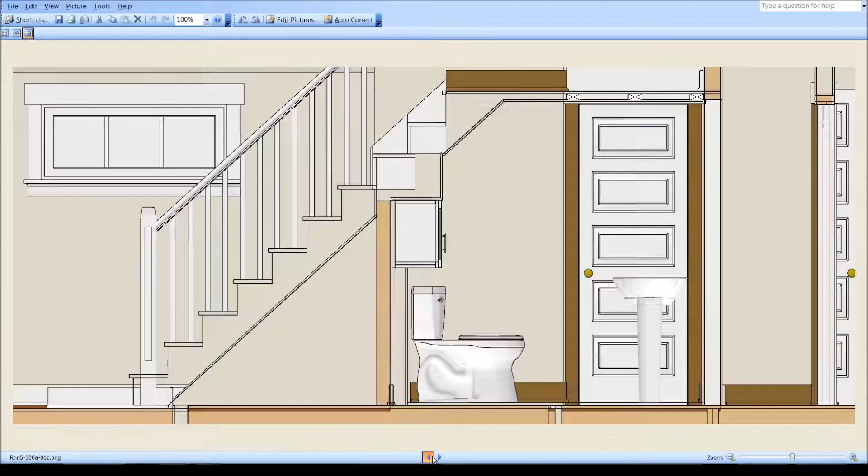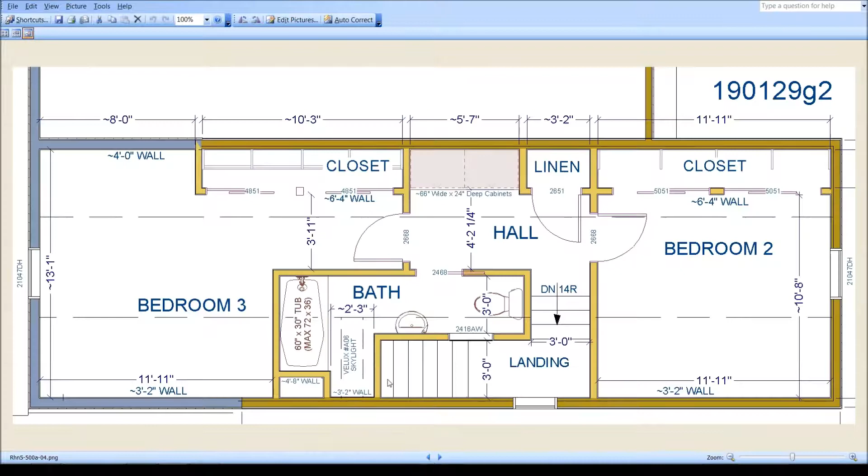These are the dimensions. Even though I don't think it's the better bath of those two, one particular advantage is pretty distinct: this clears this hallway out, widens this hallway and its passage out through here. So now we're able to get full 80-inch doors with no clipping of the corners or no special work there. So that is an advantage of having the stairs come up this way, even though the bath I think is not as good as this one.

So that was looking through here. Anything can happen here, furniture, desks, whatever. I'm just showing some cabinetry for linen storage, towels and so forth. You've got all the storage in the world on this floor anyway, but I just didn't want to add one more closet across here, so I have that left open.

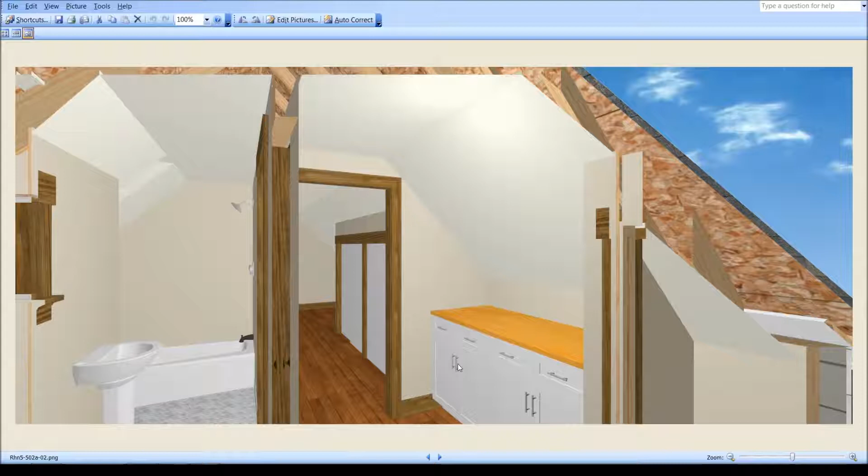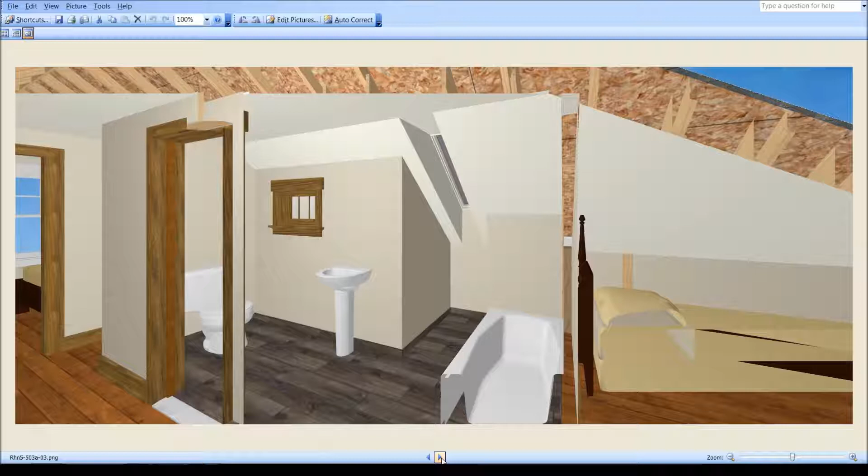And the bathroom itself, you're familiar with this kind of passage through here. This just lets some light in, some ventilation if you wanted it. This shows the skylight, if it were possible. A wider one would be better. This is the most narrow because we're not sure exactly where the framing is for this roof. I don't think it'll be added anyway, but I thought I might as well show it. It gives the person more headroom. And that's just different finishes here.

In terms of that window and privacy though, this is a 6'6" guy standing out here on the landing, and you can see that privacy inside here is not going to be compromised by this opening. That could even be just an opening, although I don't know.

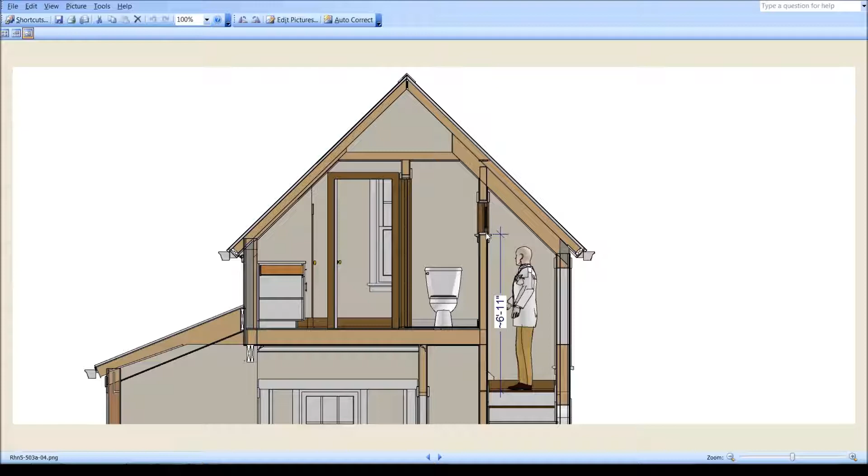In any case, even if you wanted that as an operating awning window that swung out this way, you can see that it would still do that and no one could see in or anything of that nature.

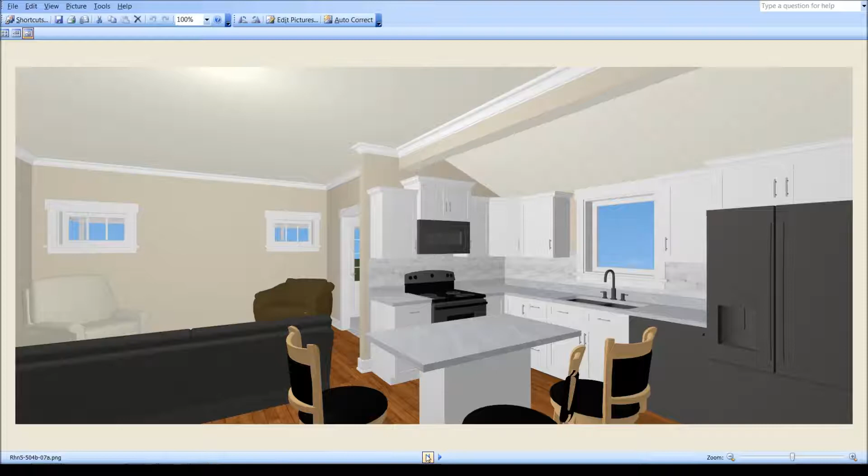And there's without the dimensions. And here's essentially how it looks. We're not going to do that, so that's not even a consideration, as you can see. I made various explorations with a window here. It's not this one, probably not this one either. And with any of these windows, if we put a sill on it and finish it like these others, which it should be, that could also compromise the swing of a door here, so it's something to keep in mind.

I like the kitchen having been relocated up here, not just for the fact that it makes a bigger living space down here, but I think it's going to serve the house itself better located here, and I wanted it east anyway. So I'm a fan of the kitchen here, and then it's just a case of how can we make that work the best with the rest of it.

This entrance is somewhat under the landing, but this is full height, or as high as we want it to be. And this short section of film might give you a little bit of an idea of how that shower is tucked in under there, and how the rest of it looks in this condition here.

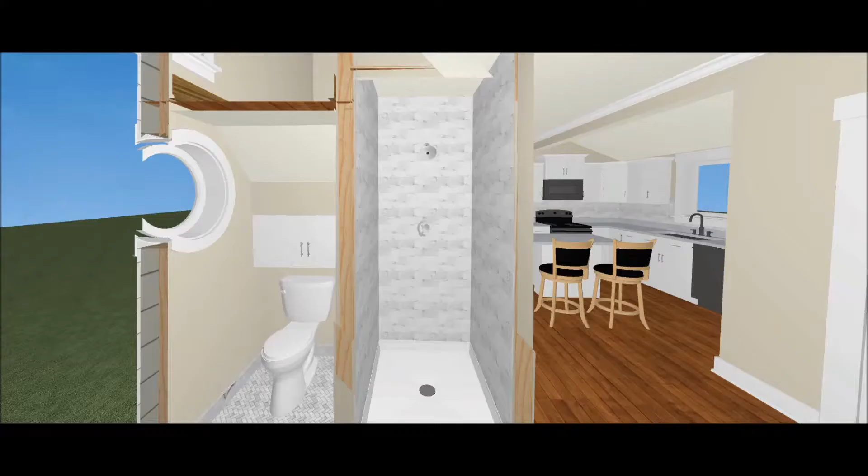And I want to mention with regard to this door and all these plans, keep an eye on it. This is with the typical storm door, and granted, you could always use one of these sliding screen doors that just slides across. Then it's not really even an issue. But I'm showing it with the screen door outside, and when it's hinged this way, you kind of have to step around it to open the door and get in. Whereas with it hinged the other way, it's much easier to have a regular storm door outside and get in and unkey it and everything else.

But this doesn't introduce very well to the rest of the living area. So that's what I think you should probably settle on, is it hinged that way, and just deal with this storm door, or just get what they call a zip screen, and it coils in. You're probably familiar with it, where you don't have any storm door outside. It's weather protected anyway, and it'll be weather stripped, etc. So the coldness isn't so much an issue as getting in and out. And this isn't too bad here, and I don't know if it gets worse in other plans. It may or may not.

But that's just something to keep in mind. Additionally, with regard to any of these plans, in any of them, I have maintained a 3-foot zero door either here or here, sometimes at both locations. So none of the plans have just 2'8" doors. At least one of those entrance doors is going to be a 3-foot zero door, so that you can get furniture and big appliances and so forth in and out without cracking open the roof.

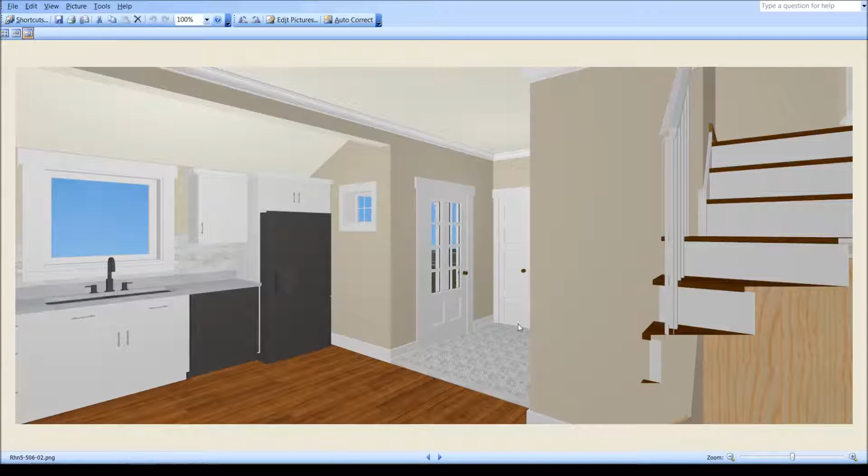And we'd have to decide whether we want a similar beam coming across here. It's not needed, but whether we want that to kind of set this area off. I'm assuming this would have a different floor covering than the rest. So I don't know if that's put in. I don't think it's needed. It's probably more complicated than it's worth.

More experimentation with this window here. I wish I was showing that door switched around, because that's how I would do it, period, and just deal with the storm door outside however I have to, or screen door however I have to. I kind of like this one at the end. I like the view, I like the light. I like to be able to see who's coming to the door when you're at the kitchen sink without having to step around.

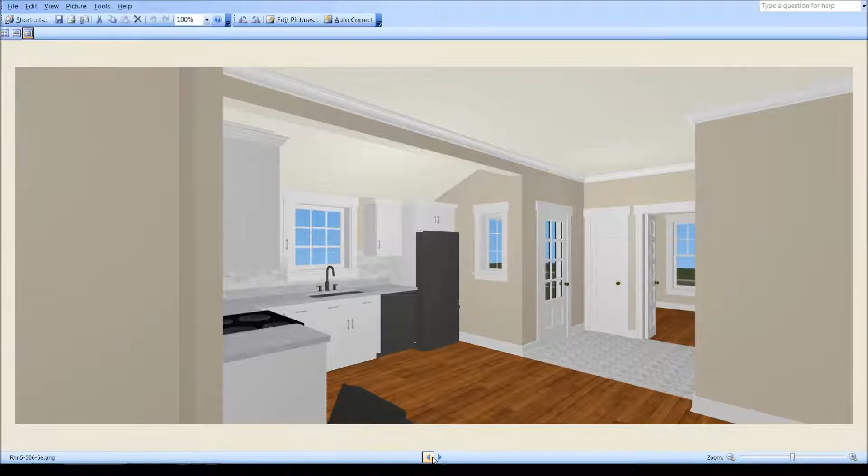I believe I've already talked about this island. Hopefully I have. If I haven't, I'm not going to discuss it again, but I think that should be a table with legs here, with the legs at the four corners, and a drawer at each end going that way and going this way. Nice drawers, 5 or 6 inches high. Still got plenty of leg room, but just particularly this one to provide another top drawer within the kitchen.

There's a 2'8" door, entrance door, 3'0", with or without that beam. There's the closet door open.

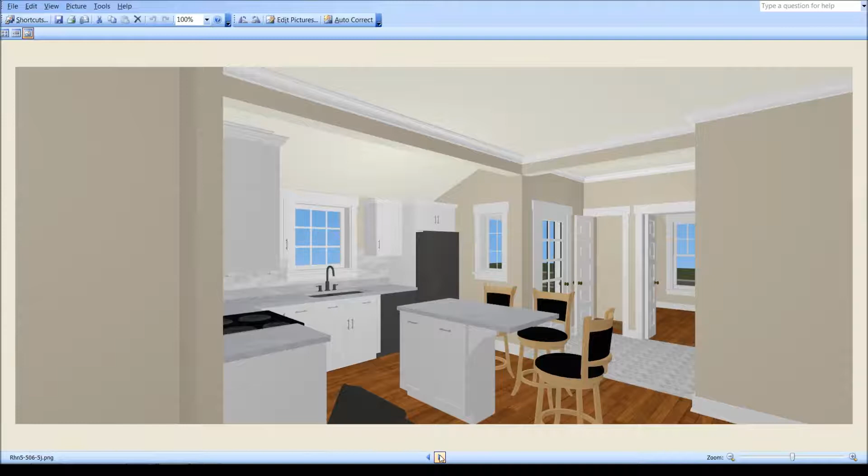Okay, and the next move I made, because I didn't think that we needed this large of a shower for this little bath and just on this floor, and I thought this extra 6 inches here was taking up some room. I didn't like how the floor covering interfaced with this, as you see in this photo here. Down here, not positive about that. I like this arrangement better.

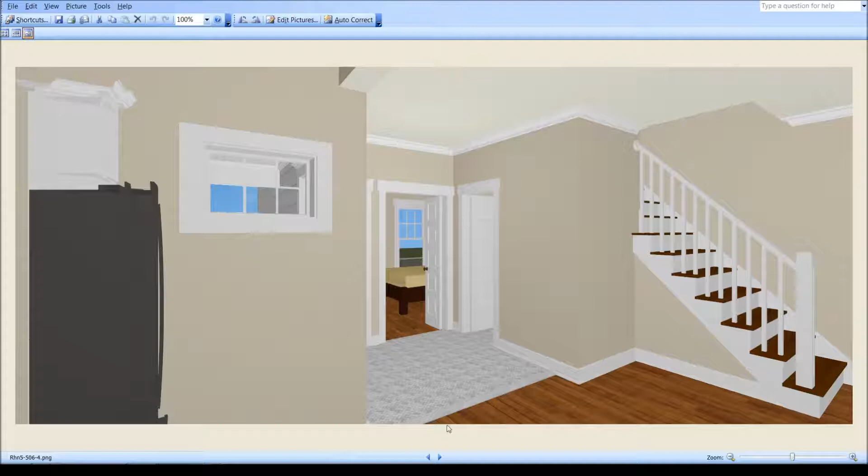This wall was brought forward to provide a place for this railing to end without getting into an argument with this crown molding up here. So I pulled that back another 6 inches and went from 36 by 42 to 36 by 36 shower. Still have all the same clearances, still have the 2'4" door in here.

And incidentally, if the full bath happens upstairs, this door could actually be down to a 2'0" door. I've lived with one for 30 years and it's not bothered me. But it'll be maintained at 2'4" throughout the drawings. So I pulled that back.

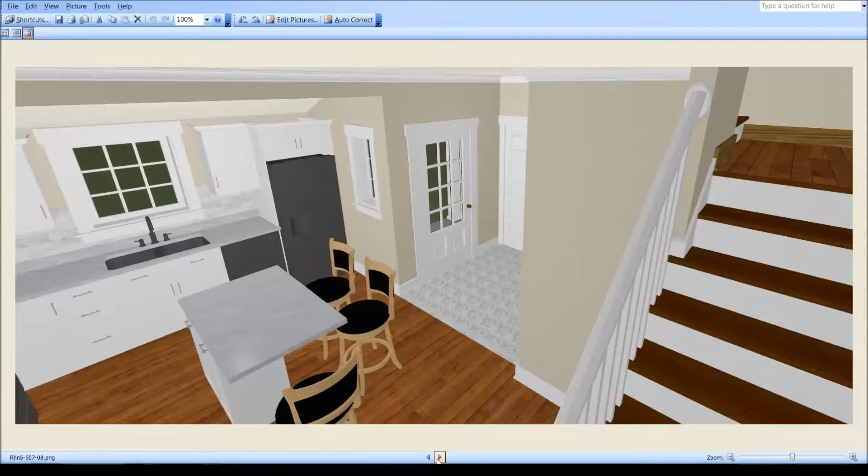That's 6 inches. I didn't really like the result of that up here. I think that could probably be improved, but that was just put together for the moment, just to make sure that that's doable. I think it is. Something just needs improving up in this area here. But I just feel that's better than the other way. I did like that there was less of an offset at the floor covering down here, but I didn't care for that upper part there. I think it could be improved.

And it could be that you actually want the little larger shower, 42 deep, front to back, rather than 36. And if you do, it doesn't really play a role. It can happen regardless. There's no impact because nothing really happens in this little area here. Next, though, we have to begin to deal with this here. I didn't really want this, and I didn't think it should be like that. So I started to experiment. These next several slides are going to be with regard to this region here.

First, I thought the kitchen might be a little short on cabinetry space. I know it is on space for pots and pans and bigger items like that. I don't see any large drawers or anything like that. So I thought maybe a pantry is added here, a standard pantry that you open the door and it's all shelves top to bottom. I don't think that I would do this where it's just this piece. I think it has to come all the way across like this. Again, don't forget these model numbers are critical to identify anything.

Some of these ones that are into the tens here, 62, 72, 92, those are where I've returned to revisit a particular plan. But this was one way to deal with it, and I think actually we could use a little bit more space in the kitchen and it won't kill us down here. And so I pulled that forward another 3 inches to take these from 18 inches wide to 21 inches wide. The washer and dryer are still back here, hooks on rails, shelves in here, and a full pantry here with a 3'0" door from the mudroom.

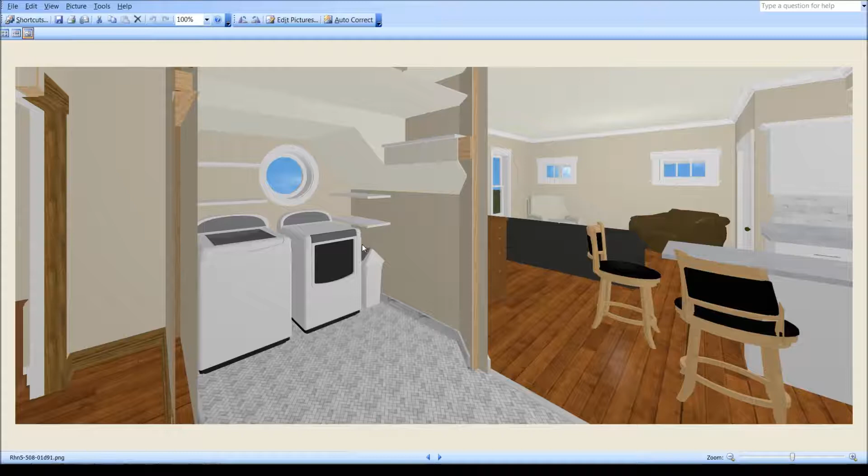I guess if somebody needed it, these machines could come closer together, and some sort of small laundry sink could go in here. I know there's 15 inches of room, so you could have a 15-inch laundry sink in here with the trash moved elsewhere. Here's a section view of that, how it looks through there.

And then the final move just endeavors to make this closet a little larger at the expense of 4 inches in the laundry room here. Like this. And now we can return to your regularly scheduled film.

And this is one of these plans that I had returned to 63. But I had worked with this a little bit more before I even pulled it those 3 inches, just working with the 18, and this was actually the first when I pulled it forward without the pantry at all. We just had the laundry wandering around in there, and there was space to be used. This is kind of an unfinished plan here.

So that was actually the first thing I looked at, just recessing a full height food pantry cabinet in here without a standard door. I wasn't sure that I liked the look of that though, or the expense compared to just buying a door and putting some shelves in, which is going to be just as effective as the cabinetry. Kind of wanted to keep this more living space back here and not have that kitchen flavor spilling over here, even though I feel like this pantry should happen in any plan.

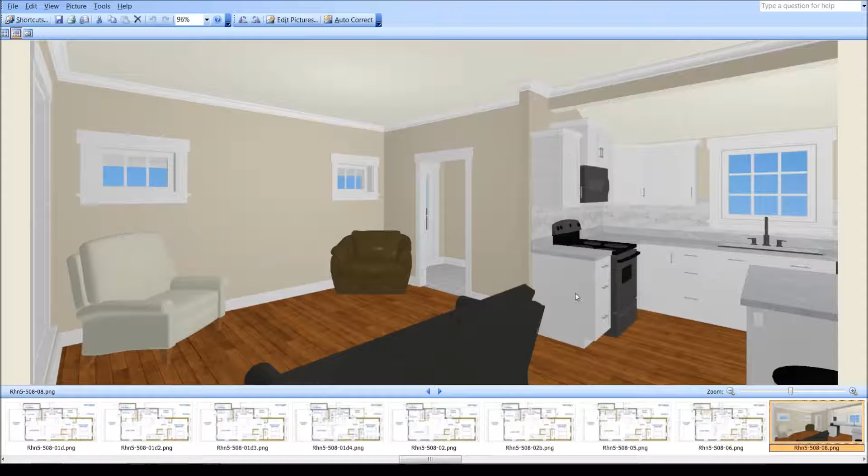But before I decided upon the criticalness of that pantry, I experimented with some other alternatives back here in this space. And so this is just going to be a run through of photos of those various changes. This was the bare minimum we needed for the kitchen with these 18-inch cabinets here and here. And this was adding that regular pantry. Open, see all the shelves in there, plenty of storage.

And then, I wouldn't do this. I don't think this looks good with this notch and that chair pushed back there. So if the pantry's done, I think that should probably just be omitted and pulled over and provide some shelves out here in the mudroom.

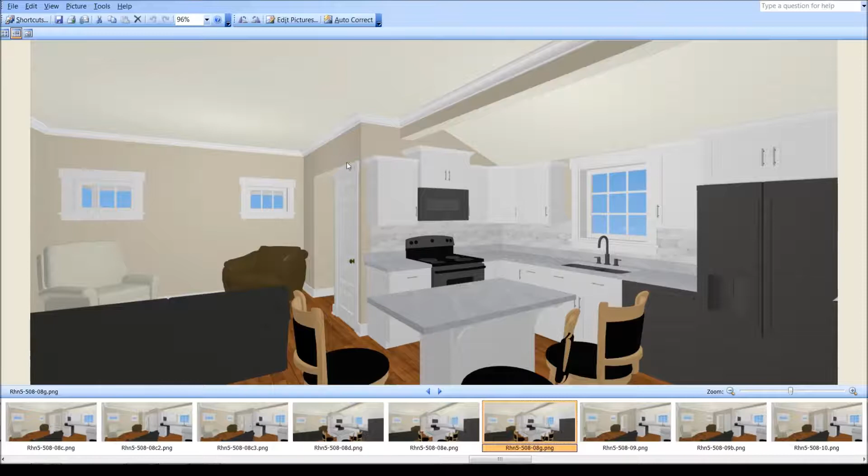And this was getting the extra 3 inches at the left of the range. You see it with just the pantry, pulling that across, and there's the extra 3 inches picked up at the range, which I also think should happen as well. So all of the plans from here forward will show this wall located at this location here.

These were those later ones, the earlier ones, however you want to say it, without the food pantry here. This provides a nice space for art, and maybe there is enough space here or elsewhere in the house for food storage, I don't know. I guess pots and pans can go over here, or maybe this island has some sort of open shelving for pots and pans. That was the built-in pantry there, which works too.

This was when I moved the laundry to the other side of that room back here. So the door's over the laundry. That's a little coat closet back there in the mudroom. That's the recessed coat closet to clear the door swing. And then there was some work with these windows here, working with what we do exactly with these windows on that wall.

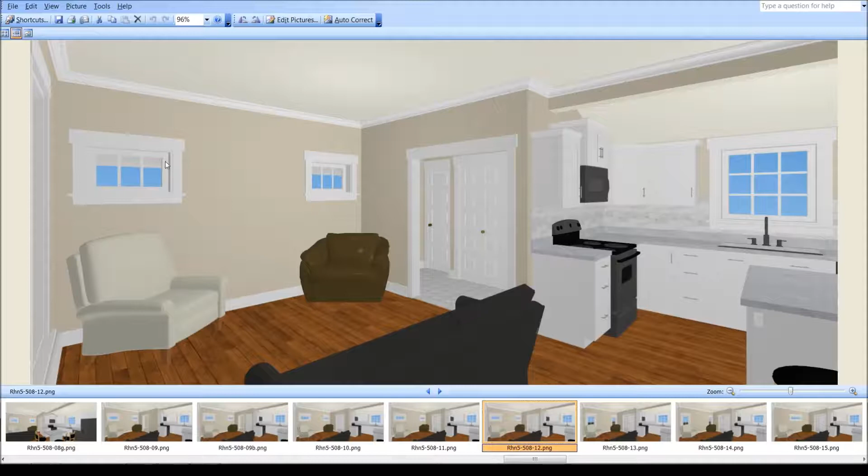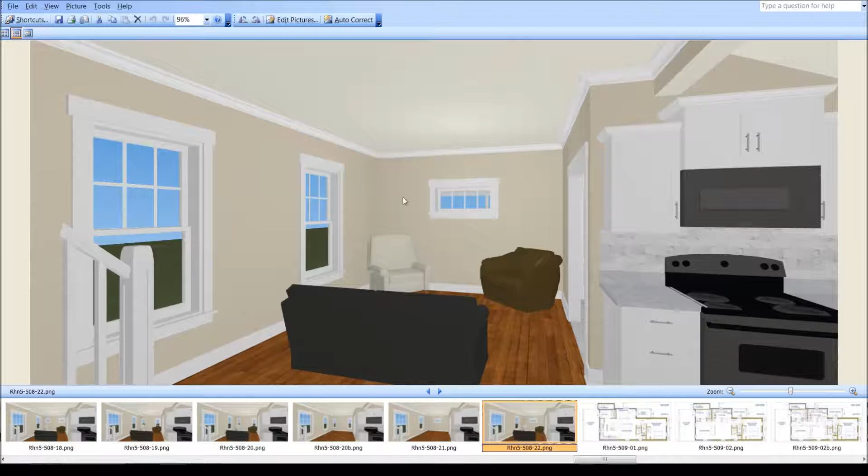Look at it from this side. Similar experimentations. Probably something like this is safest in terms of furniture arrangement, but there is good view out this corner here, so it argues for something like this.

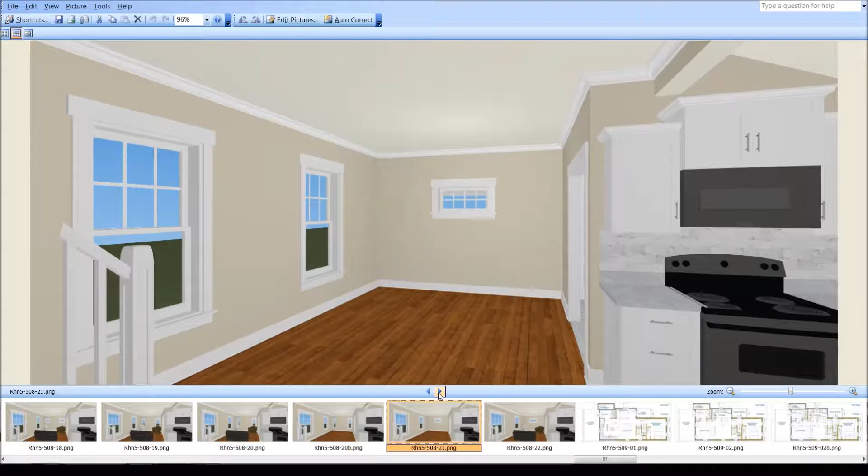The window heads have to be kept lower than these because we have that ceiling. Well, if we don't do the addition, we have the ceiling. We have a beam somewhere here, and then the ceiling slopes down if we don't do the addition. But those windows can't go any higher because of that aluminum patio cover out there. So something like that is nice and mellow, easy in one window.

So thus far, all this has been concerned with moving the kitchen up here and dealing with this back here with the stairs reoriented like this. In some of the F plans the kitchen's down here, but all of the F plans are showing the stairs coming up this way across the landing and up.

But once the kitchen was put up in this region here, I definitely knew that we would be remiss if we didn't revisit the stairs in their existing location with the kitchen in this location here. So recall our old friend F1 with the stairs in their existing location brought a little closer to code. And now we move the kitchen up here and see how that works out.

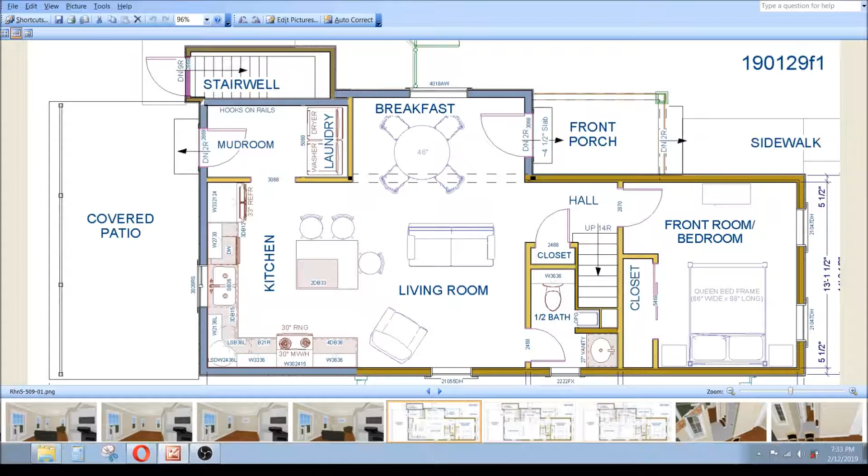But of course, at this point, this did not include any kind of bathing facility for this half bath on the first floor. One of the first ways I looked at getting a bath in there loses the little entry closet, which is too bad, but it's a necessary cost. The shower is a minimum code requirement, 30 by 30. They sell these bases, so it's doable. This is over 3 foot wide, so the toilet has a generous space in here with a cabinet over it.

Alternatively, if you want a bigger shower and don't mind a little more constricted toilet space, this is still code compliant, but it's certainly more constricted. On the other hand, the shower gets larger. That is with regard to keeping the laundry facility up in here, the stairs going up here, and what I felt was a better bath on the second floor.

And for that matter, there's no reason not to bring that toilet forward a little bit further, and you could have a deeper cabinet above it, and maybe that helps your feeling. But it's still 16 inches from this wall and 16 inches from this wall. You have a little bit more feeling space here. That was the first bath, or the baths that I came up with for under the stairs. Either that one, or this one, or this one.

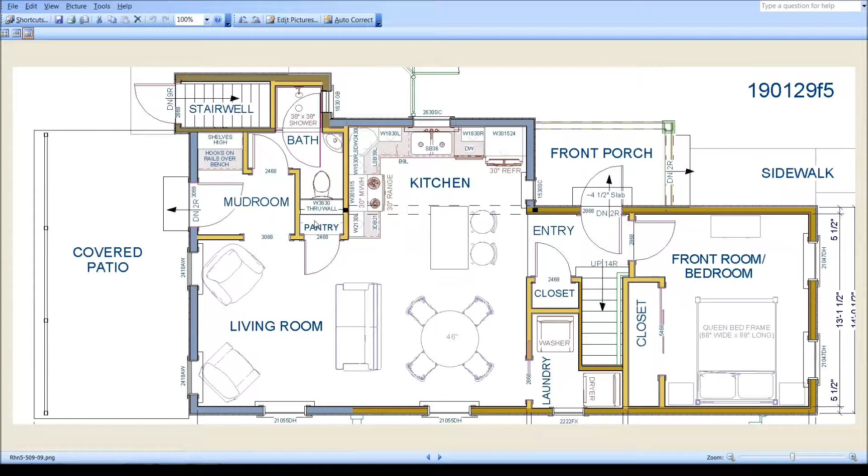And again, same discussion. This can be a stack machine here, and one thing bringing the laundry back over here does is bring the closet back to the entry, which I think is a good thing, and I kind of prefer this. I don't like that the bathroom's so far from this bedroom. This is the first bath I drew up here. I don't like that that bath is so far from this bedroom, but I think maybe the laundry is better

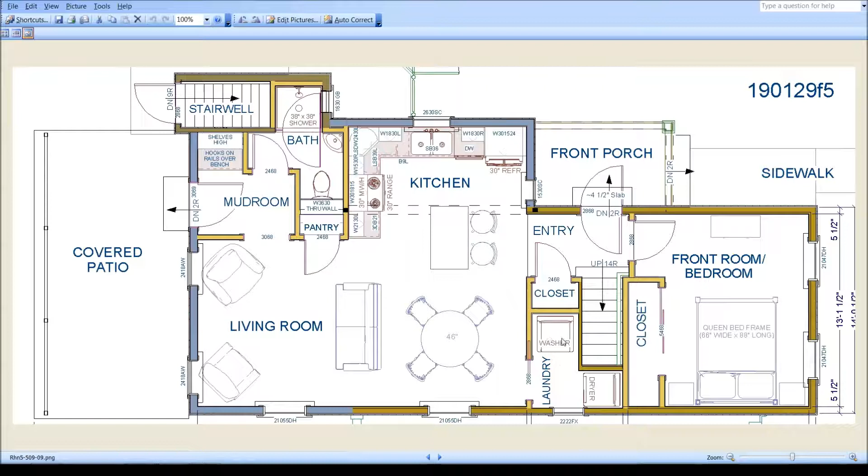down here. And remember, we had a little space in here that would come back for a little wastebasket within the laundry. So whether it's separate machines or stacked machines and some other arrangement here, once you make that decision, we might revisit this area a little. But this was the first bath. It was keeping this squared here. I think it's not the way to go, but it was just the first one I drew.

This is an available sink, a corner sink. The shower is the same size as it was down here, 38 by 38, and that doesn't change. We are utilizing the space over that stairwell to pick that up. Again, it's code compliant. It was a squeeze to get everything code compliant, but it is code compliant. But even though I don't really like diagonals, I don't like this here. I think it's too constricted. So I don't think I want to really draw that.

And before we look at some of the alternatives, I want to show you how some of this is working. I'll show you a section through here looking that way, and then a section through here looking that way. Because you notice I show another linen cabinet or toiletry cabinet or towel cabinet, whatever you want to call it, over this toilet, and it's pushed right up to the back side of the pantry here. And over here I'm showing a bench down here with hooks on a rail above it and shelves above that.

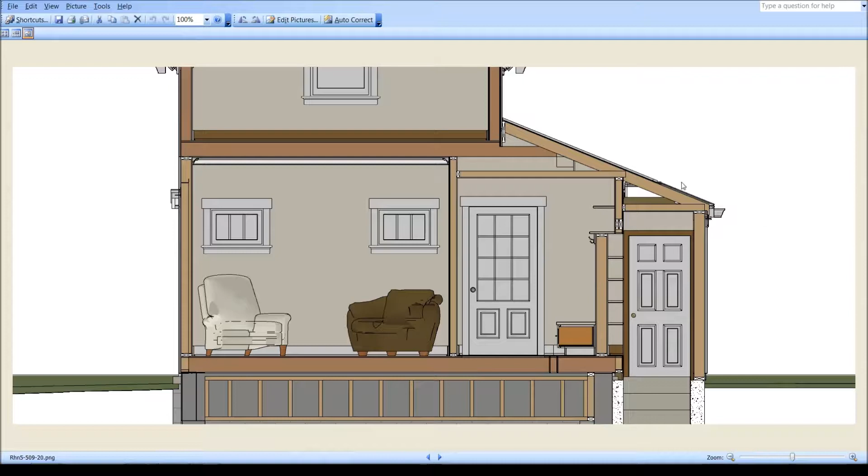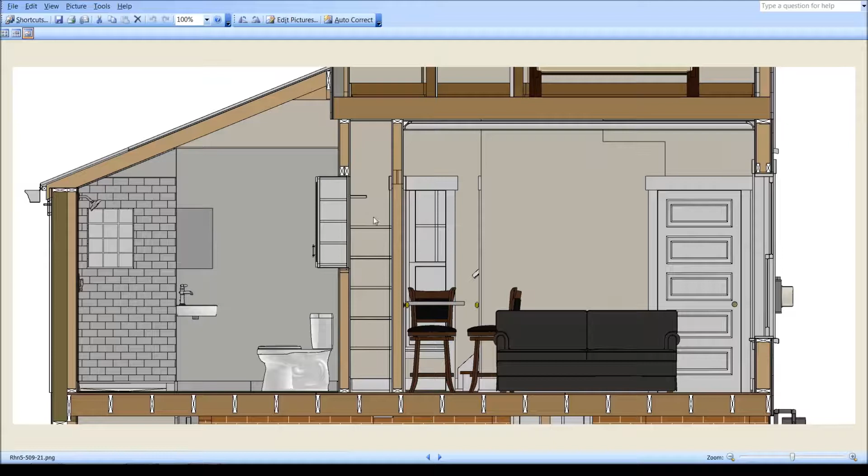If we turn around and look the other way, looking through that toilet cabinet, this is the shower. I show a little window in it, of course. And this is this big linen cabinet over the toilet. And you can see it's pushed back up to the back side of the pantry with the drywall covering the back side of it. It's quite simple, and it uses that space and gives us that opportunity while maintaining this pantry closet here at 15, 16, or 17 inches deep.

But as I said, even though I don't really like diagonals, I didn't care for this. To me, it's too constricted coming in here and weaseling all the way back here to go to the toilet. So I think if the bath is put up here, then probably something like this is better. This does not change the section view through here, that stays the same. It does add a 27-inch full height toiletry and towel cabinet here, so this probably wouldn't even be needed, although the toilet can't go back any further anyway, so you may as well have it.

And actually I think that door probably swings this way. We need a place to put a light switch. You can see if that cabinet goes in here, there's no real space for a light switch on this side. And plus I like this door opening this way better. It could stay open back here if it wanted to be. Gives you a 23-inch door into the shower.

Here's one. And the final thing that happens, I believe, is if this laundry goes down here, we don't really need this to be 3'0" or 3'1" for the toilet or shower in here, and so that could shift back over 4 inches, which picks it up at this kitchen bank here. You'll see that door open full like that, and then the switch would be right around the corner underneath that cabinet, with other switches for the shower, lighting and ventilation, etc. on this wall.

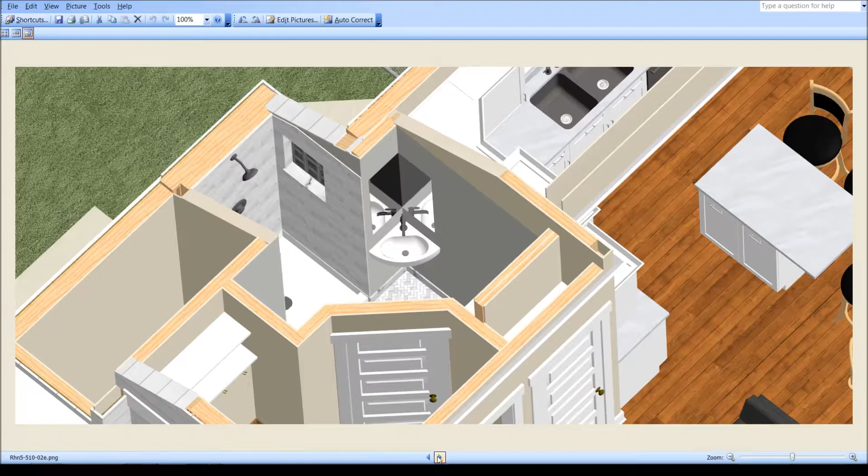Here's some overviews of that little bathroom back there, with the shower and the window. Everything's code compliant. You can actually pick up some of this cabinetry here. Come around.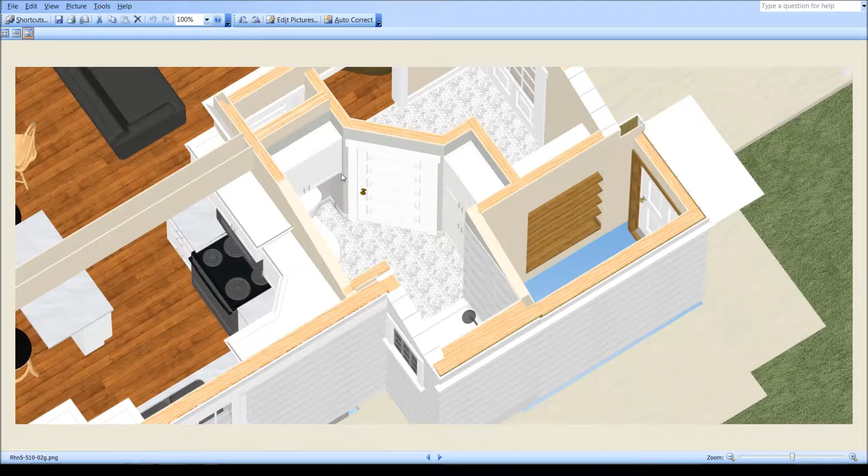Here's those little shelves out in the stairwell, the shelves in the mudroom hall, and the full height pantry or full height linen cabinet here. It's 12 inches deep, but it is full height. And the switch for the lighting is back under here. And here's the bench out in the mudroom, the hooks, the shelves, etc.

And this couch is actually not 92, but 72. Take out all the furniture and you have an idea of what it looks like once it's built and outfitted. And here are the dimensions in place. So over half of the building down here in length is a big cavernous room. And again, I can't emphasize, this table or island or whatever it is should probably be on some sort of locking wheels, if you're into that sort of efficiency, so that people could do what they wanted down here on

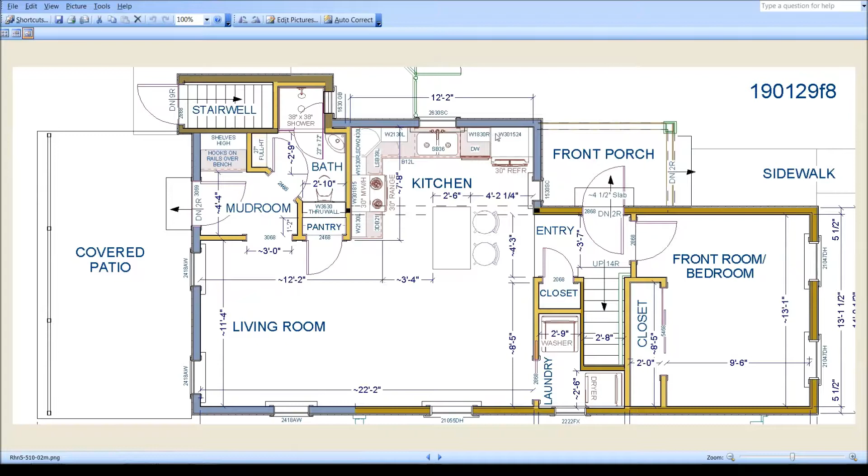a whim. So once I re-explored putting a kitchen up here with the stairs in place, I also revisited that second floor bathroom. Recall that this was the bathroom with a little tighter of a hall through here. It's still code compliant, but it's still a little tighter. Nothing changes up through here, but I make a few little changes here, a few little options. I want to show a few options on this bath in case you go this way, so that you can keep this in mind.

Again, I don't think these skylights are happening, but nevertheless I'm showing them because they're convenient and they get light into this building. Also, here there was some space that was available, particularly if this becomes a desk or something like that out there. Here's a little cabinet, 30-inch wide by 12-inch high, pushed back here above the toilet for your toiletries or whatever you have. There's no real room for a standard vanity in here. And over here, whether this is cabinetry for toiletry and linen, there's room that could be a dressing table instead.

Also be aware that the tub arranged this way with the shower head this way, that gives you your code compliancy right there. And how long that tub becomes is immaterial. So if you want a longer tub, there's a 5.5 foot tub. A few little changes here, but nothing much. This becomes a little more shallow. It's only 15 inches deep now. But that's if you wanted a longer tub. You're not tall, so it's probably not a consideration. But it was doable.

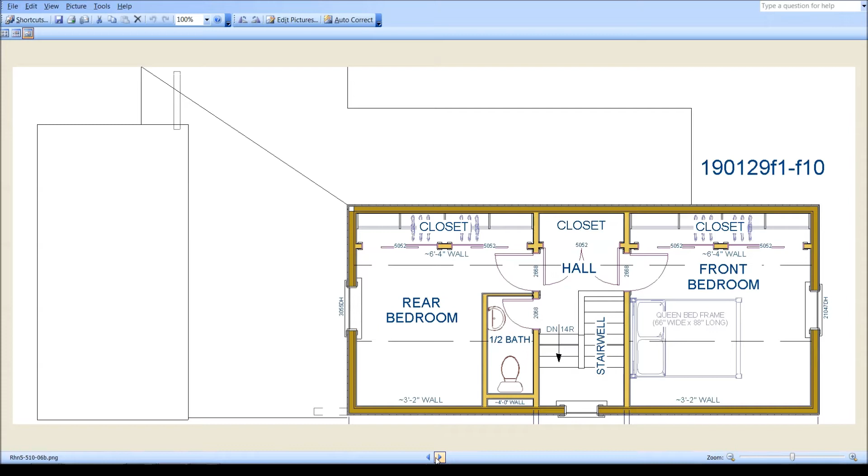And finally, if you think that toilet is too close to the door, there's room to push it back to that maximum. If you don't add the addition at the back, this was what we had for a half bath at the second floor. And finally, I think there's a few more alterations on the second floor bath if you go with the stairs this way.

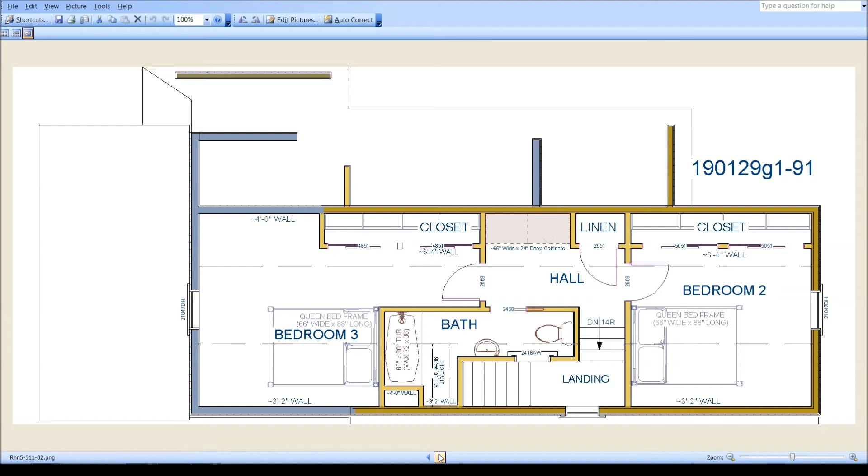This was where we were, and then just to be aware, if you get the shower on the first floor, and a person wanted to go without a tub period, they could actually gain some space in this bedroom 3 back here by putting a shower in there instead. I'm showing a huge shower, big generous shower with a bench here, and optional skylight, and the ceiling starts sloping here, but you're not going to bump your head; if you sit down you're fine.

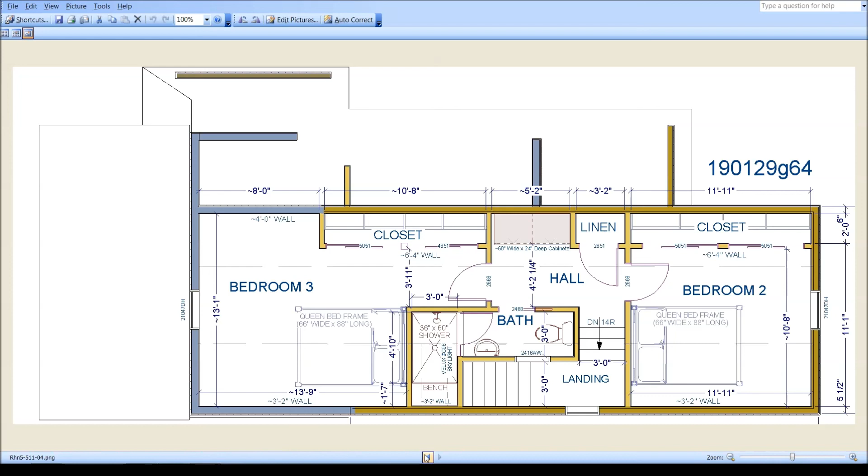So that was a little bit of a different thing, and when I shifted that and got rid of that tub, because at the tub you needed space in front of it here, that's the requirement. But getting rid of that and going to a straight shower, if this was your place and you didn't need a tub, that lengthens bedroom 3, as well as taking away 6 inches or so of this space here. But it lengthens bedroom 3 by about 1.5 feet. And the dimensions on the second floor. So I'm pretty sure that this has all become very confusing, but feel free to get with me on any additional clarification I could provide.